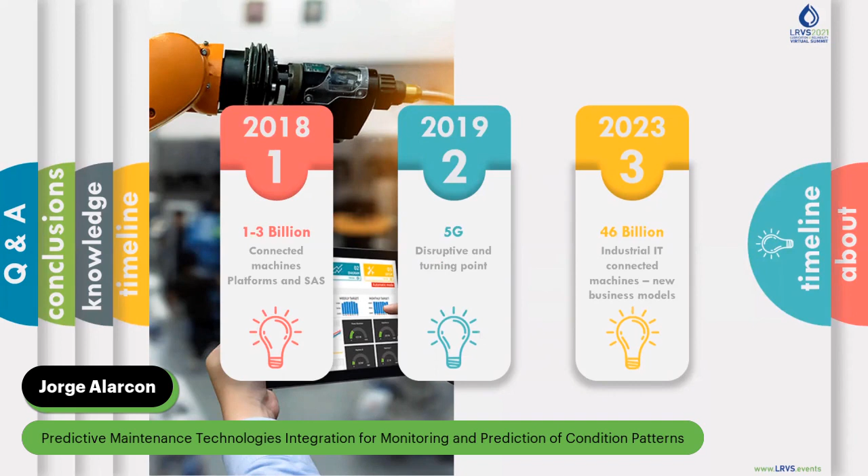So if we start analyzing the data that we had a couple of years ago in 2018, depending on the source, we can identify that around 1 to 3 billion industrial machines were connected. We mean connected to the internet, to some kind of platform that allows the end user to see the real data, the actual data that the equipment is having during the operation.

So what happened a couple of years after, between 2019 and 2020, depending on which part of the world you are, we have been hearing that 5G technology is available. So 5G will change dramatically how things are done, not only at the industry level. It will change a lot about the way that we as humans work during the day. So, for example, with 5G technology, the machines will be able not only to transmit information and data as numbers, but also videos and sounds, and that will create a whole new world, not only in the way that we will receive information, but also in what we are going to do with that information.

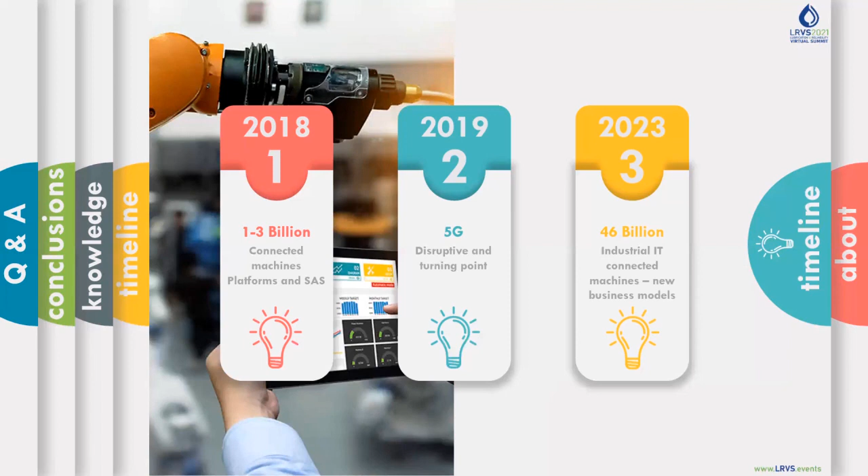So we expect that between 2023 and 2025, depending on the source, around 46 billion industrial equipment will be connected to the internet. So that will create a different type of market with new business models. The integration of machines will create a new industrial world. So in just a couple of years, around five, depending on the source, we'll be living in a completely different world because of the availability of the information that we'll have in our hands.

So some years ago in 2014, I asked a group of clients if their sites were pursuing real-time oil condition monitoring. And at that time, the answer was what we have here. So only around 1% had full digitalization on critical machines. Of course, we are talking here about large turbines and compressors and stuff like that. Around 8% would start a pilot project at that time. And around 14% had some people in their company trying to understand the pros and cons of real-time oil condition monitoring. And around 77% of those industries were doing nothing related to real-time condition monitoring. So I asked the same question every year after 2014.

So let's take a look at the answers that I found in 2021. At the beginning of this year, I asked the same questions to pretty much the same group of clients or end users that I asked in 2014, and the results are completely different. So full digitalization is 2 times what it was in 2014. The number of projects increased by 3. We're talking about just 7 years. Learning about the benefits and pros and cons jumped from 14 to 46. And the industries that are doing nothing are around just half of what they were in 2014. So this means that a lot of people are moving towards real time, in this case oil condition monitoring, right?

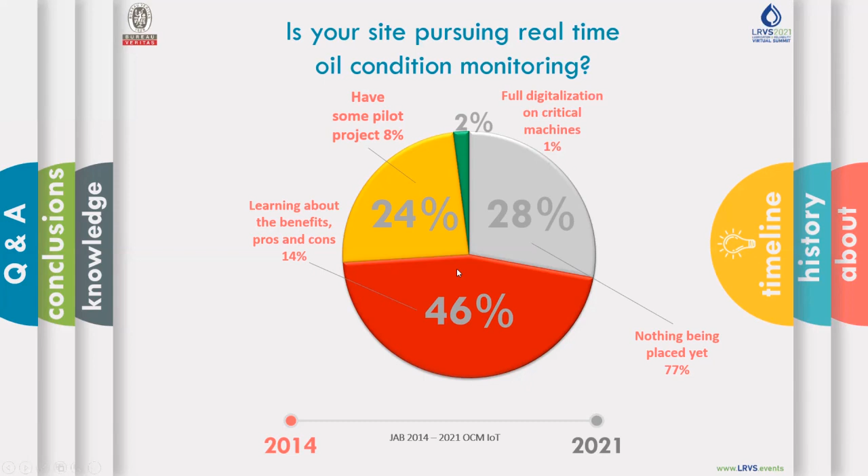But a lot of people are having projects on real-time condition monitoring, not only for oil, but for any other predictive maintenance technology. So we can see here how the market is going towards, or at least is looking for, something that is integrated in real time with platforms. So if that is the case, what does it take to see the impact of sensors in the market? Because we're talking about a lot of people putting in pilot projects, a lot of people installing sensors.

So a lot is happening, but we are not seeing that impact yet. So I developed a study last year, and I was analyzing the impact on reliability and the maintenance benefits that we will have from the sensors. But what is happening? Why are we not facing that stage yet? And the reason is very simple, right?

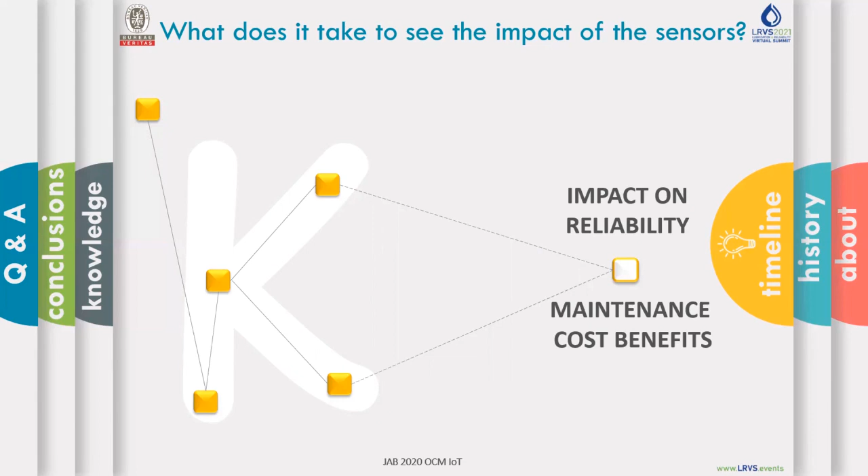So for a sensor to be in the market, the company has invested a lot in research and development. And at the same time, the size and the price of that sensor was really high, so it could not get into the market until it came in with a reasonable price, and the research and development technology would allow putting that device into equipment, for example. So we're talking in this case about market penetration.

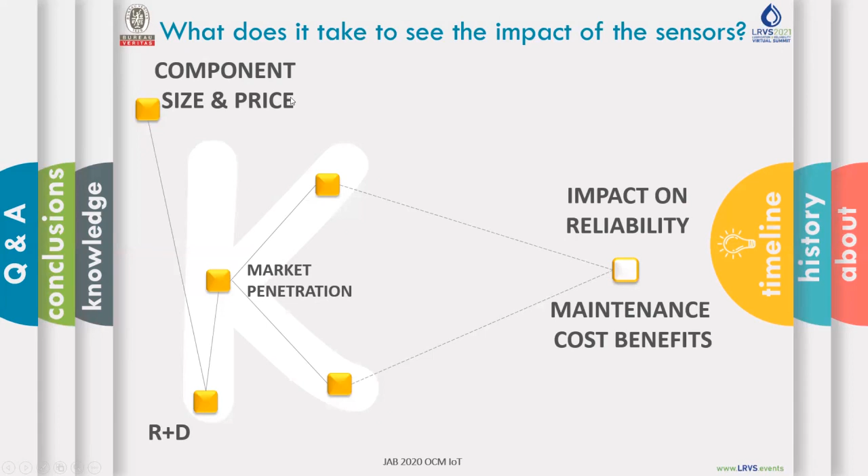So we are in this stage here with the market penetration start. We have components that are the size of a pen, and they are pretty much under $1,000, $2,000. So they're accessible for any type of industry. If we go back, let's say 10 years ago, I was working on a project where the component could not be installed in a gearbox, for example, because it was probably twice the size of the gearbox, and the price was extremely high, right?

So we are in this phase right now when market penetration has broken through, with a lot of new devices and new technologies in the market, but we are not seeing the impact the way that we would like yet. The main reason for that is still price. We're talking about sensors that are still out of the range of many companies, but the most important thing is that the applied knowledge from that sensor is not what we would like to have yet.

We are not in the phase of understanding 100% what the sensor is telling us. And that is the problem right now. For some companies, price could be a problem, but for others, understanding what the value is of having that sensor installed in the unit is the main issue. So we will get to a point where sensors will impact reliability, maintenance and cost benefits when these two things get down, and we understand what the sensor is telling us.

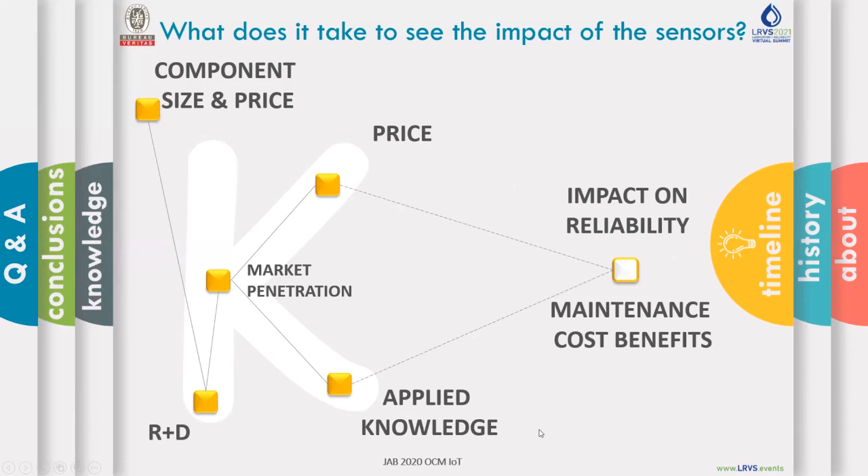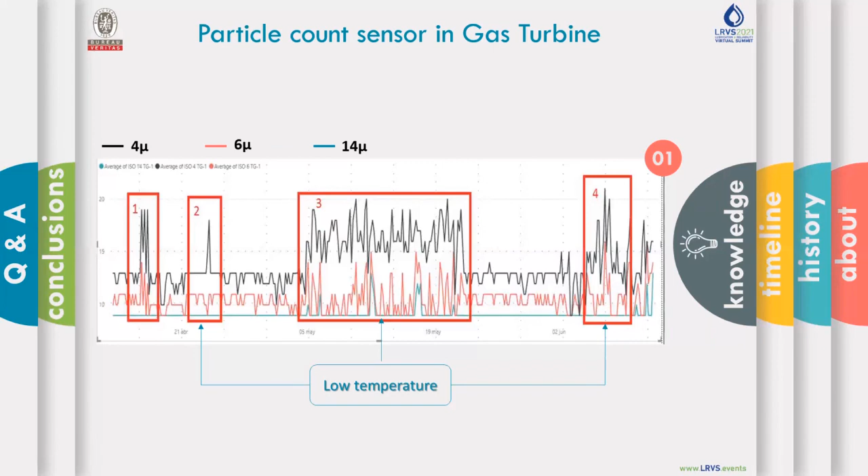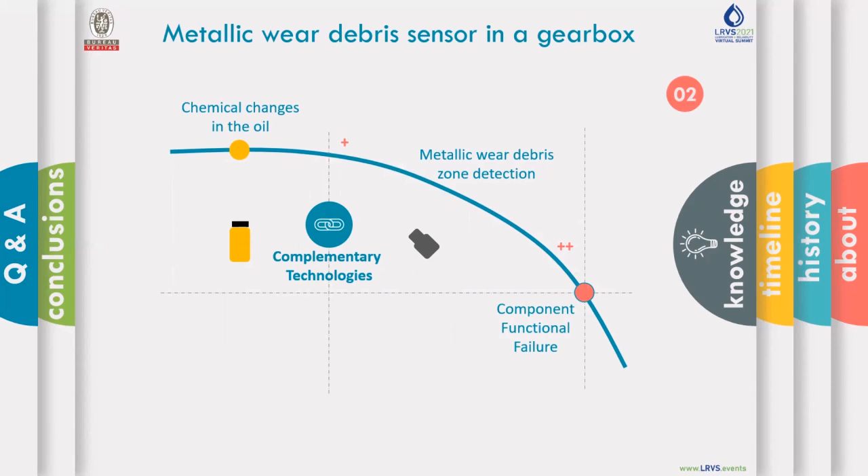And we are moving towards integration in some fields, not only between different technologies, like in this case, but also integration with operational data, like in the previous case. So we are starting to see this integration more often in different fields. So what is this integration? We are talking about an oil analysis sensor. We're talking about operational data. It could be temperature or pressure, depending on the component.

It can be generation of energy, and the predictive maintenance technology that was previously working on this component. From our perspective, this is the oil analysis lab that will feed the information on the chemical changes, the contamination and some other variables. So what is the boost?

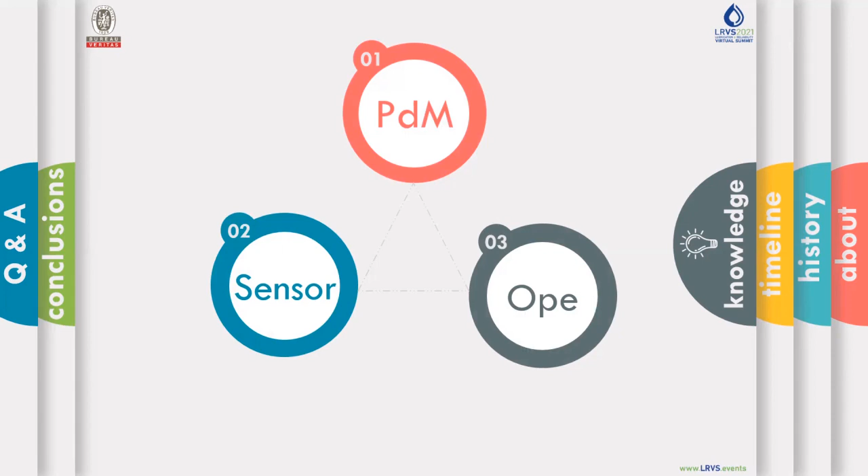What is boosting these three things, and when are we going to see a real change in this scenario, and why? It's because of artificial intelligence. Artificial intelligence is the enabler that will allow us to put at least these three things together, probably a couple more, depending on the type of industry or the type of component.

The reason artificial intelligence is going to do that is because the amount of data that we have accumulated from sensors plus operational data plus the oil analysis can only be analyzed by a different approach than the ones we have right now, and that is artificial intelligence. So it's probably a key component in this entire new scenario that we are getting into.

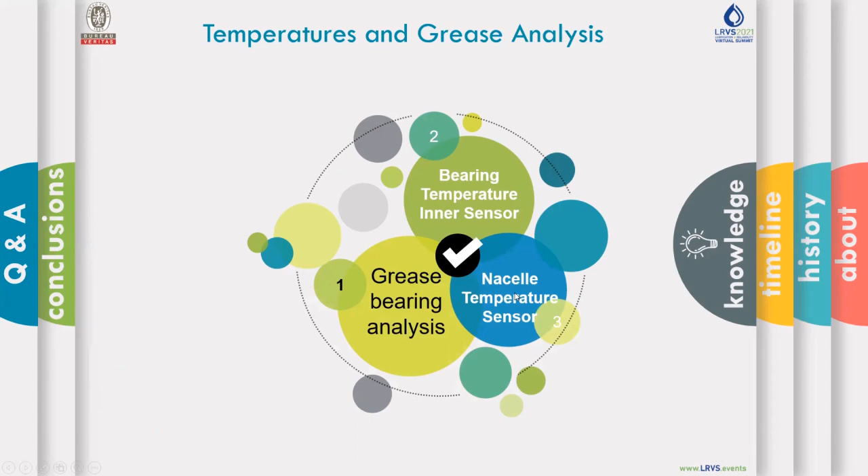We put this information together with the bearing temperature sensor and the nacelle sensor, because we found that the nacelle temperature also has an effect on the grease. We know the temperature will increase if there's a lack of grease. With no grease lubricating a bearing, we will have metal-to-metal friction, and that will increase the bearing temperature. If that temperature increases, we know we will have an increase in iron or ferromagnetic elements. So if we filter the units that had an increase in temperature, we will easily know which ones need more attention.

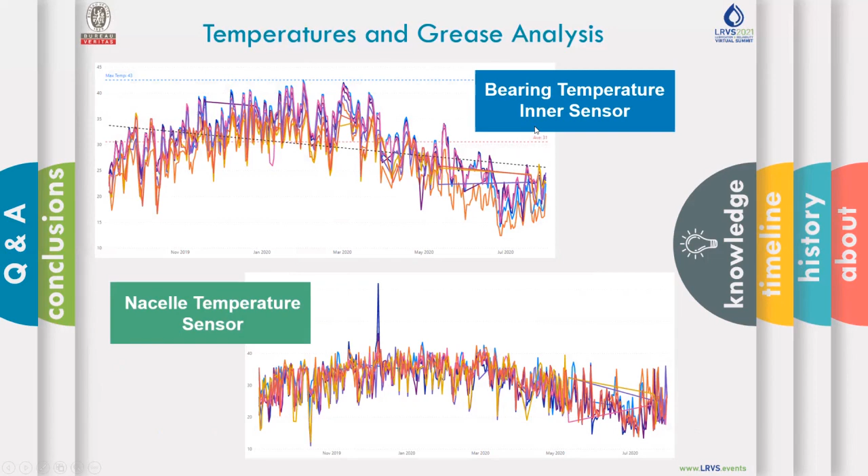But these are just two temperature sensors, and we need to add the grease analysis. A site may have around 100, 200 to 300 turbines, which means 300 main bearings. So which one is the one we need to pay attention to?

So based on the algorithm provided by the temperature of the nacelle and the temperature of the inner bearing and the grease analysis, we found that only these units may need attention in the next 3 months. So we can forget about the rest, 295 units, and focus just on these 5 units that are really suffering from wear due to many different reasons. So basically what we are doing is isolating those that need attention.

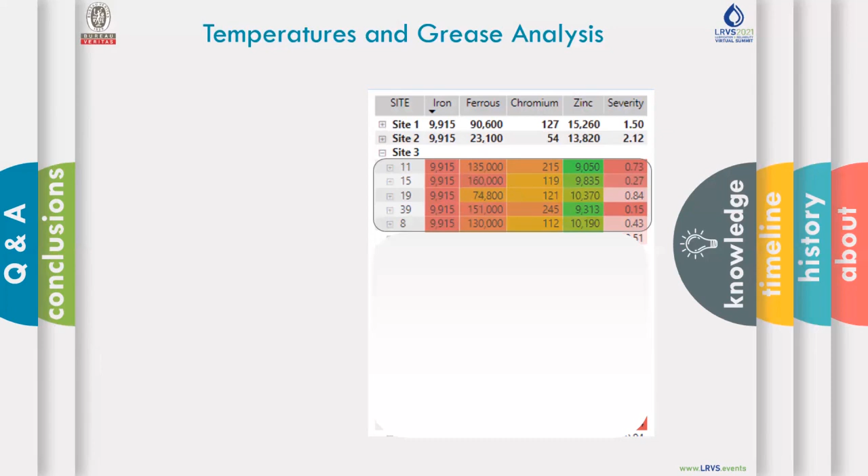So this is just an example of how the integration of different technologies, like grease analysis in this case, and operational data like the temperature can benefit the end user. Those are the units that need more attention.

So what is the path to have an artificial intelligence combined with OCM, with oil condition monitoring? The first thing is data collection from many different PdM tools, not only the lab, but the sensors and operational data. The second step is to run a data analytics

platform, right? Starting with statistical analysis, clustering, segmentation, and of course, and this is the most important part for me, oil condition monitoring specific knowledge and expertise. A lot of companies that are putting a sensor into the equipment forget that they need to have that specific knowledge. What does it mean? What is the information provided by the sensor? What is the specific meaning of that information?

And based on that, the next step is to create a prediction model. A prediction model is basically what's going to happen if, right? So in the simple example that I showed you before, what happens if the temperature increases a couple of degrees? We will have a potential increase in the wear debris because of metal-to-metal friction in the components, right?